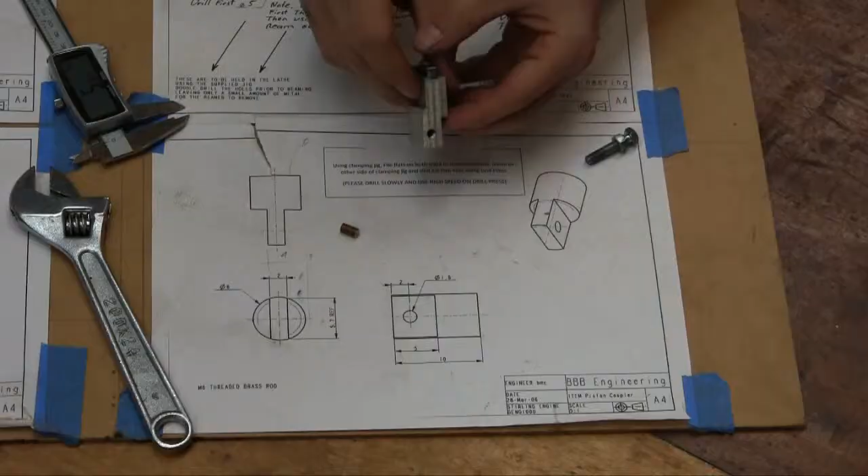Okay. In your build kit, you're going to find this. This is a jig, and what it does is allow you to file your job. So it assists you in holding it. So we're going to use this part of the jig here, and we use this part of the jig here. Like so. So off your drawing, it says that you want to file 2 flats 5 mil long.

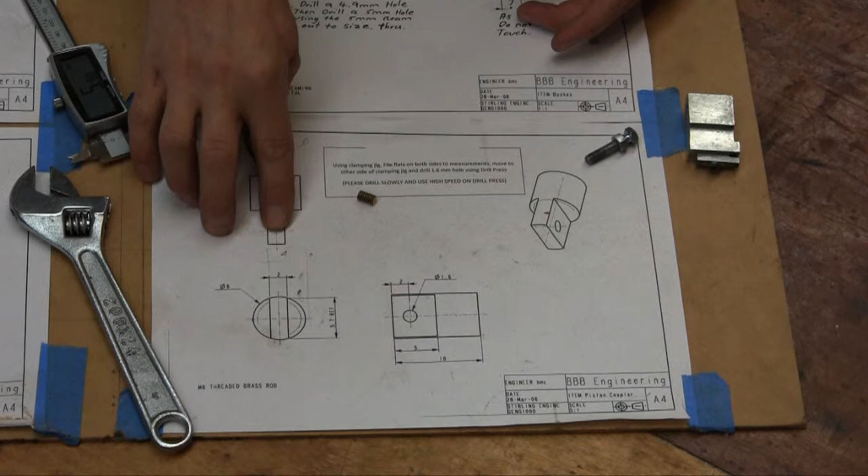So there's your length. And it says that we want the centre bit here left at 2 mil thick. So what we do is we go 6 minus 2 and take whatever that equals and then divide that by 2. So that works out that we need to go in 2 mil either side. And the flat we want left needs to be 5 mil long.

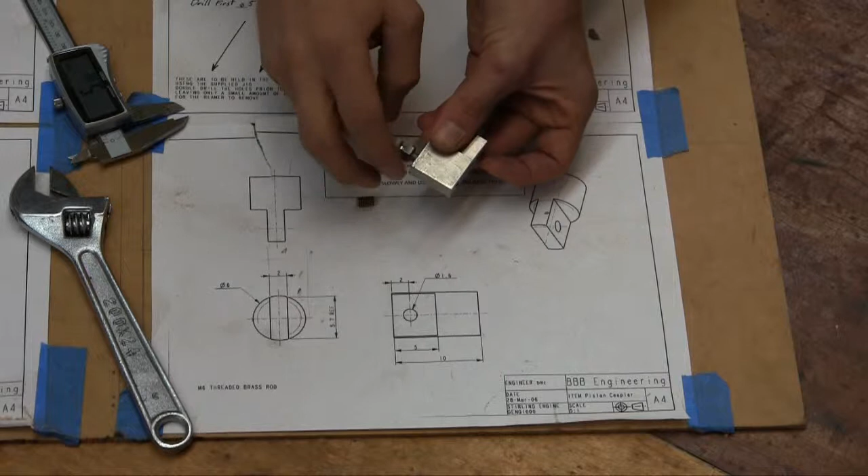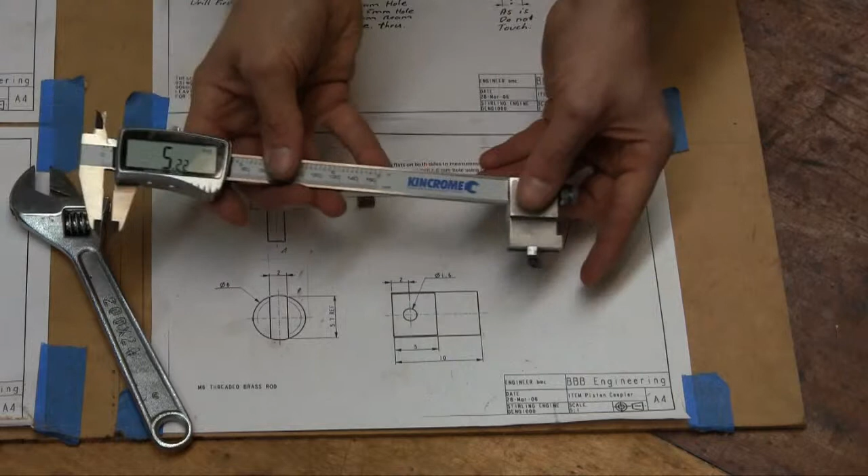So on your jig, there's a little thread there, and then there's a bolt, which goes in there like so. What we're doing is we're going to wind that through so that there's a depth in there like so. Okay, and with your verniers, and with the end part there, sit that in there like so, and check how deep that is. So by our drawing, we want that to be 5 mil in there like that.

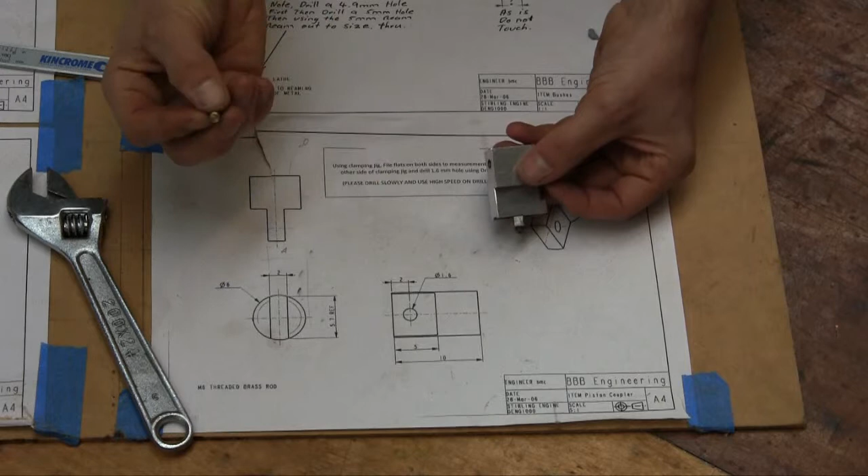So you can adjust it out a little bit, and then do the locking nut up like so. And check that that's 5 mil deep like so. Okay. Then you take your little brass piece and wind that in. So what that does is it gives us 5 mil out there like that. So this is our part of the piston coupler put into its jig. Okay, so it's been wound in there.

Then what you do is sit it into your vise, come right over the edge, make sure it's flat that way, and do it up. Okay. When we did the general induction on files, we talked about the different types of files. So this file here has got a safety edge on it, so it actually doesn't have any teeth. So what we're going to do is use that edge there against our jig and file down. So the measurement we're going to file to is 4 mil thick. So this is the first half of the piston coupler.

Okay, the technique you're going to use, this is brass, so it's going to file quite easily. Pick it up like so, pinch it there, and we're just going to do a cut like so. What you want to do is keep that flat that way with the job and flat that way, so you get a nice flat face. Righto, to start the cut, and lift it off.

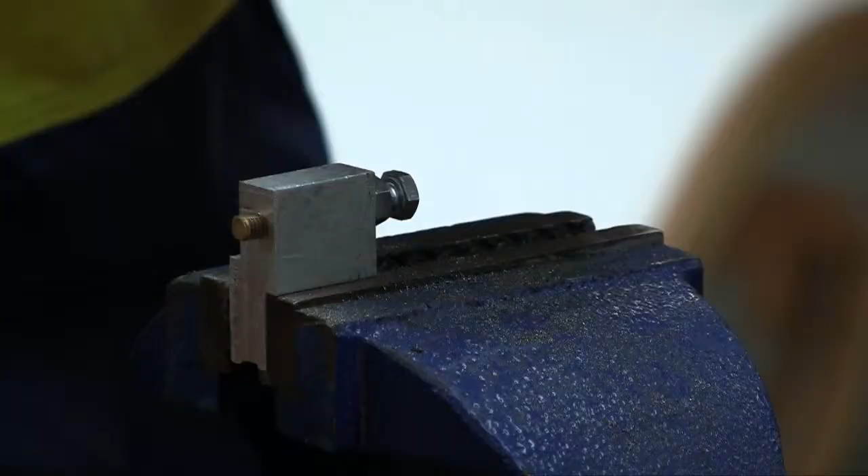As you can see here, the flats of the top of the thread have actually been filed away now, and you see a flat face starting to form. Okay. So when you file it through and lift it back off, through, lift it back off.

Okay, at this stage now what we do is we stop filing, have a look, make sure we're flat that way and flat that way. So what I'm doing is I'm looking at that face there with the top of my jig because I know that's flat. So we're right there. Next thing we're going to do is check with our digital calipers what measurement we're up to.

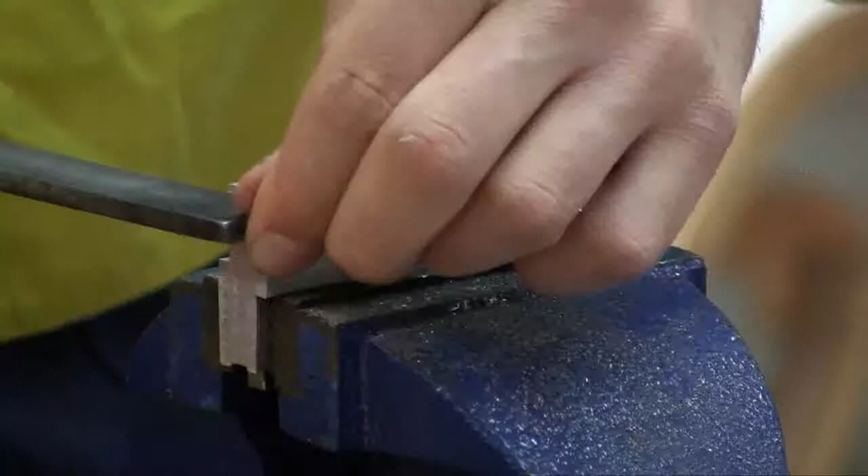Stop. Take it out. Okay, as you can see the technique: in, nice and straight, flat. Come and have a look, just see how you're going, so it's flat that way. Checking my measurement again.

Now what we're going to do is flip it over and do the other face. And we're going to work back to 2mm thick now. So put it in the vise, do it up, and start filing back the other way. So same again with the safety edge against the jig, and file down.

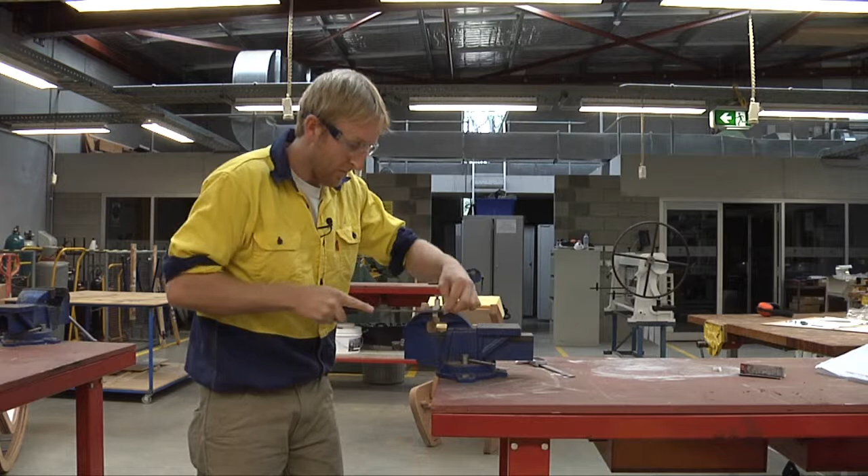Okay, stop and have a look and make sure that your face is square or level. Take it out and check your measurement. So the measurement we're working to is 2mm. So we've filed down to 2mm thick. Okay, so that's that one done.

So once you've filed down to 2mm thick, sit it back in your vise. And because we've been working with brass, it gets quite a sharp little burr on the end there. If you run your finger over there, obviously you may cut your finger. So with your file, just gently go across the face there. And that's it, and that will deburr that job there. So the sharp edge has now been removed.

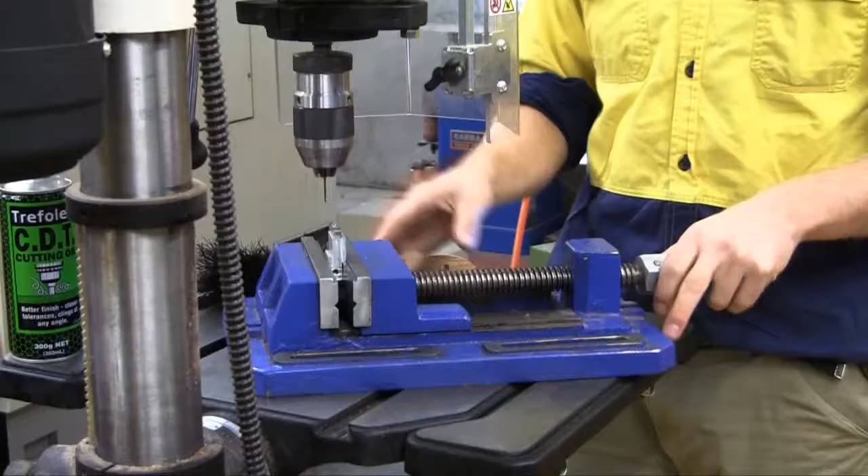So the machine's not on at this stage, and we just bring it down and get our 1.6mm drill bit to go through that hole without deflecting. So deflecting is a sideways movement on the drill bit. So.

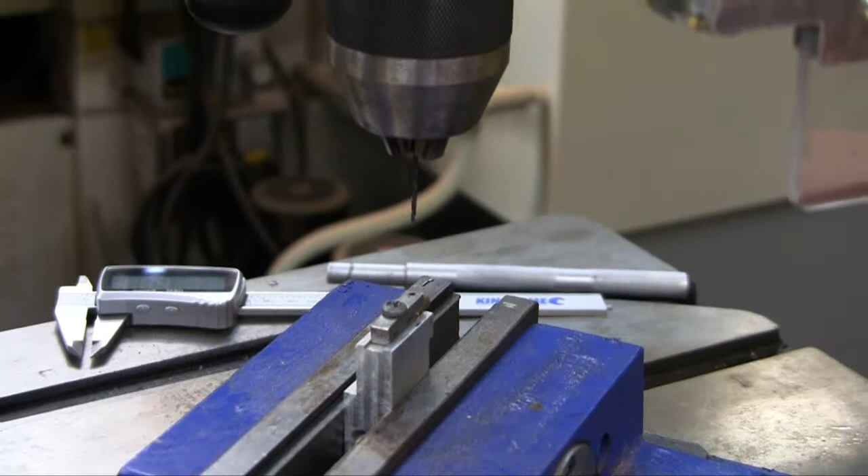Okay. Now we're ready to turn the machine on and drill straight through. This piece here is made of brass, so you don't actually need to put lubricant on. Brass is self-lubricating, so you don't actually use any spray on this one. Okay. So.

And just the same, we're going to use the peck drilling method. So we go in. On the top of that, you can see the swarf coming away. And we're through. Turn the machine off. Undo the vise. With your bench brush, just give it a quick clean. And I'm just going to get the screwdriver and undo the top screw, and our piston coupler should come out.